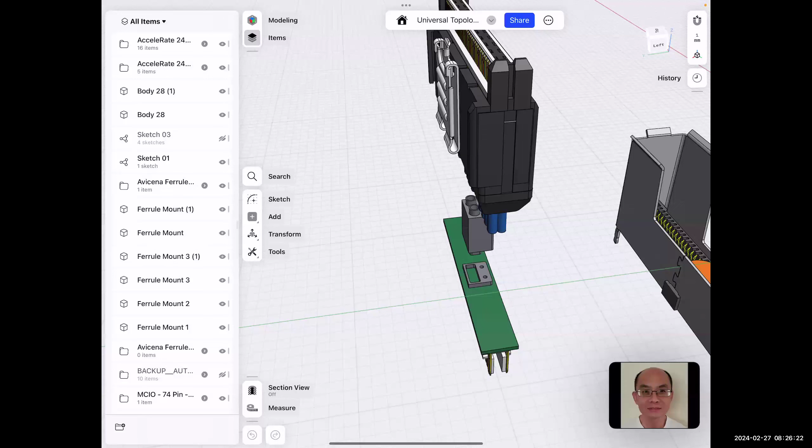So yeah, what I'm going to say is, for the optical, you have to have a paddle card, right? So I don't know what's your judgment - when you're talking about that slide and going around the paddle card argument, it seems you prefer no paddle card, but obviously if you do a universal connector interface for optical, seems a paddle card is a must, right?

So there's obviously 4 different cables we could do, if I've got them all right. One is passive, just copper cables, no active parts at all. The second is active electrical, where you need a paddle card. The third is active optical, where you need a paddle card. And the fourth is co-packaged optics, where you'd really only need a body, a mechanical body for optical fiber alignment, when you mount these fibers in. Does that make sense?

Yeah, so from what you're talking about, I just feel you are talking about the argument of paddle card versus no paddle card. You are only talking about the passive solution.

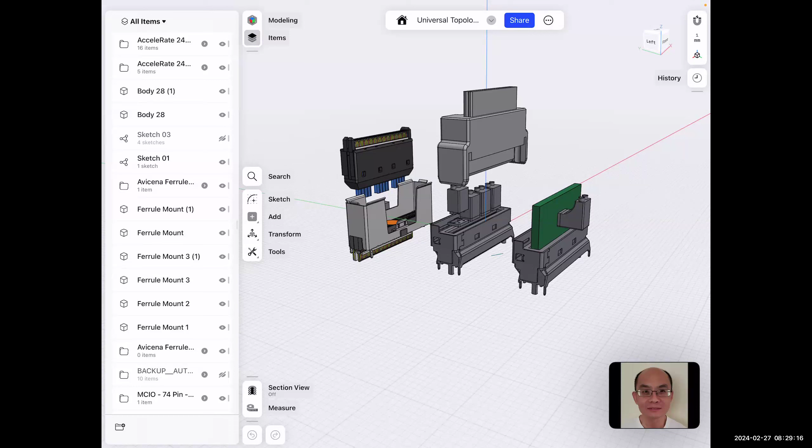Otherwise we could do a paddle card for all, which would be this one - this is the MCIO that we were talking about.

So therefore, the passive approach is you just solder the wires onto the paddle card, and the paddle card then connects to the pins. So yes, we can do this.

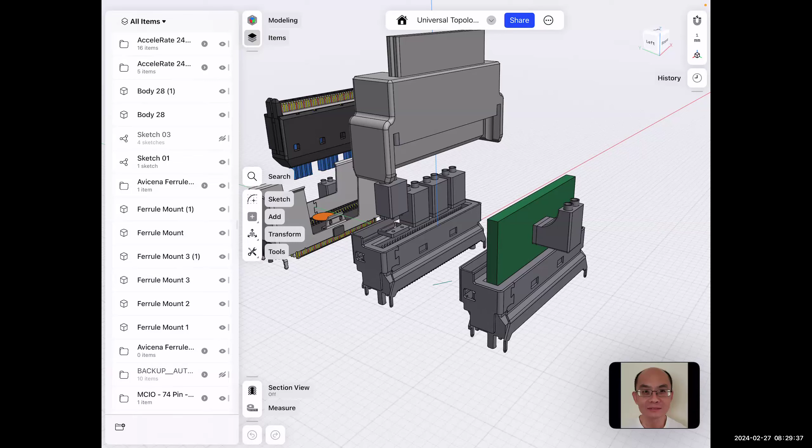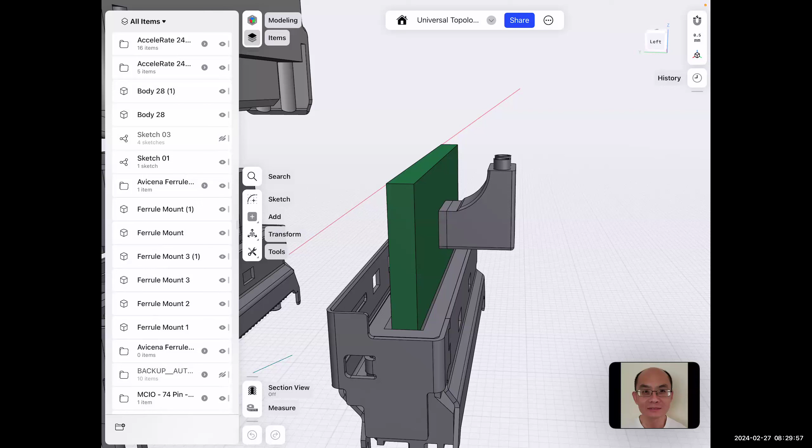I guess with the Avicena implementation, the optics is mounted on the side of the paddle card, and then you have to bend the fiber, and you have a certain bend radius because the optics comes out the top. But I guess the optics can also come out the side if it's silicon photonics - they can come out the top or the side. So fair point - if they came out the side, then this paddle card would work.

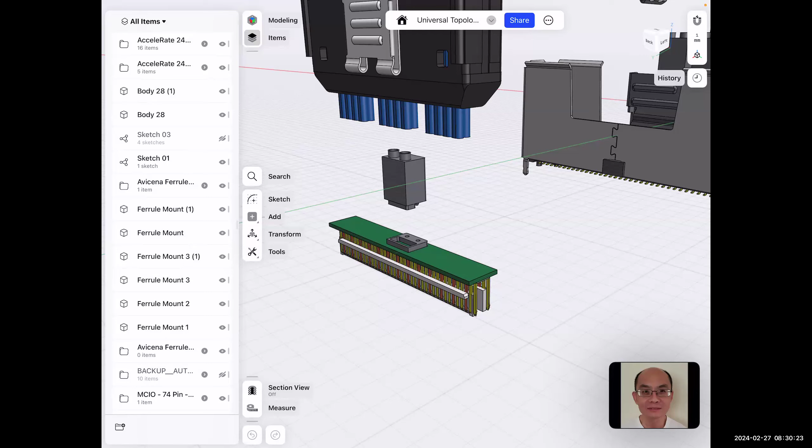What I was showing here is the Samtec Direct cable connect, and I was suggesting we could put a paddle card circuit board onto the pins like this for an active cable, and this would be good for a very clean vertical launch off of this board here.

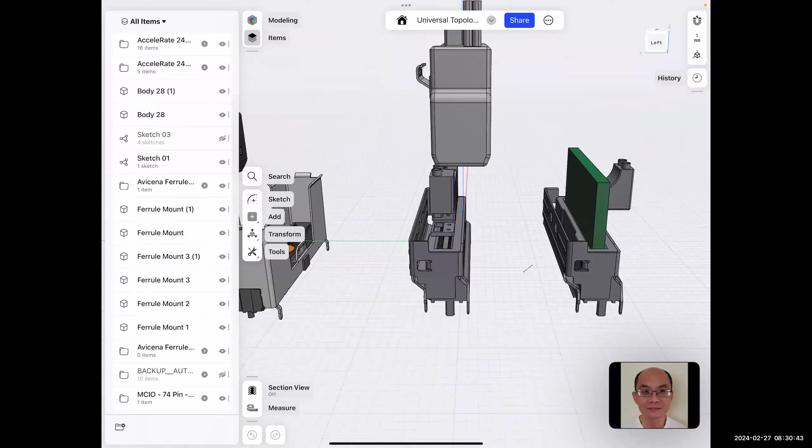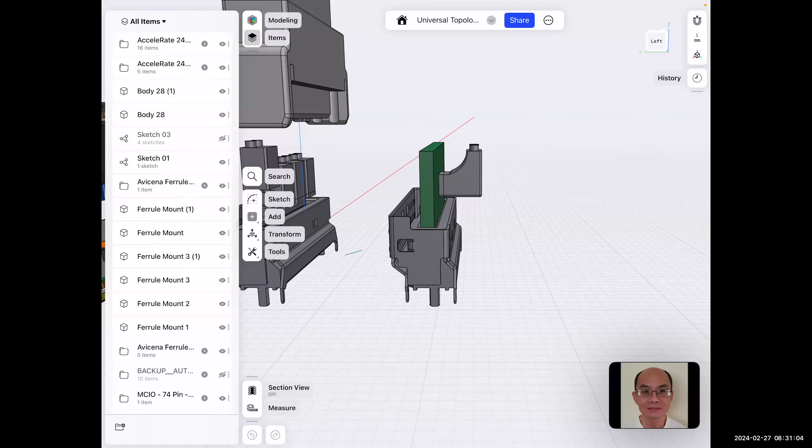I guess the only thing that felt not right was we seem to be going through too many 90-degree bends. You've got the motherboard where the connector is mounted, you've got to go right angle to get to this, then you're on a paddle card vertical, and then you've got to go vertical out and right angle again to get the fiber out. So suddenly this connector has got quite large because of the launch of the fiber cable compared to a paddle card mounted on something like this.

Does that make sense as to what my thought process was? I'm not saying it's correct, I'm just saying does that make sense? Do you see what I'm getting at?

Yeah Alan, yeah, I understand on the optical side. I was trying to think about when you talk about the slides about the paddle card thing. And actually on the MCIO, right?

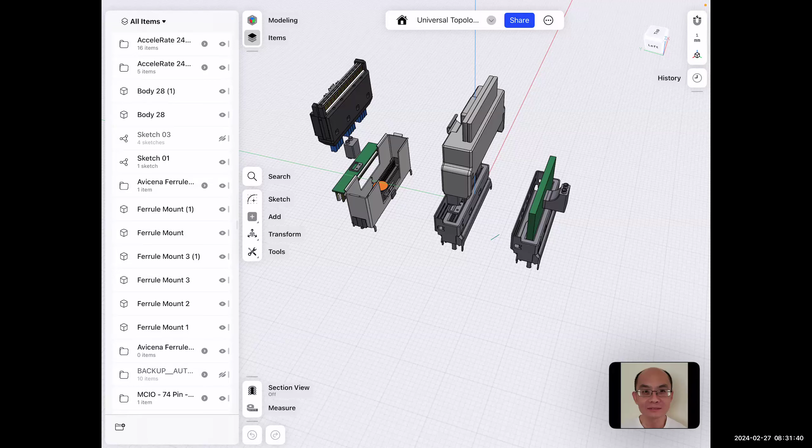We are also, for the passive solution, it's not always like a PCB paddle card is being used - depends on the performance needed. So that is a little bit different, I think, from the standard. So for a passive, it isn't.

So how does it work, because MCIO is a paddle card approach, right? For passive, no? So it's not always the PCB paddle card. So I think you assume the PCB paddle card has more loss, right? And you're saying it's a different material, so you don't have the different materials issue. Okay, all right, fair enough. That's me, not being up to date.

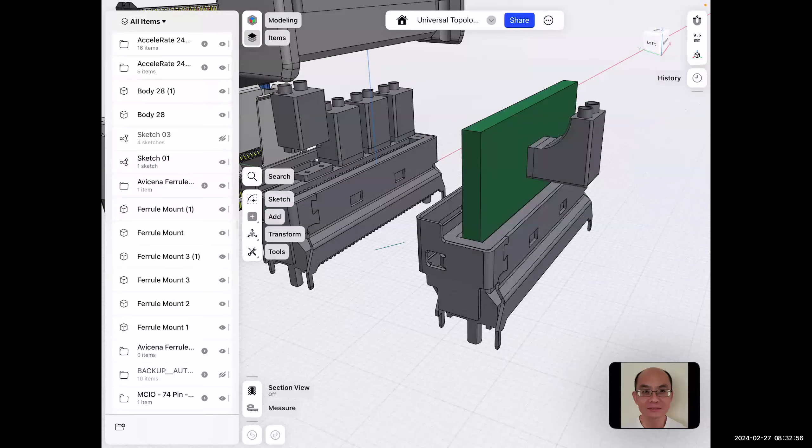So to be honest, we started with MCIO. If we can make MCIO work, then great. Obviously, when we start writing this spec, we have to deal with how these things launch.

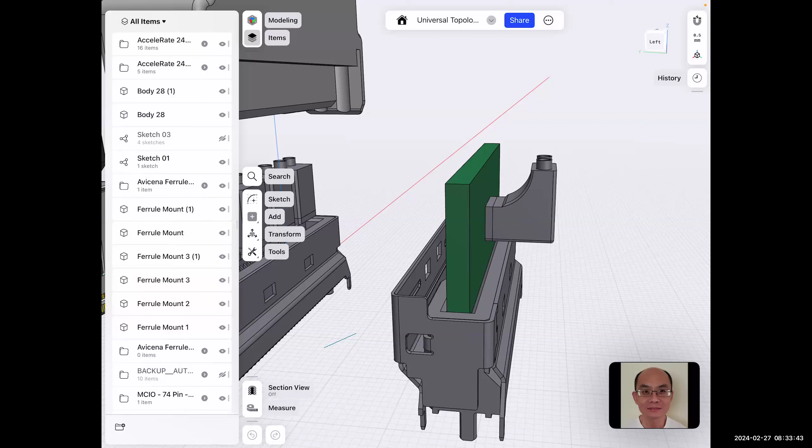Like this launch here, I don't know if this is the minimum bend radius - this is what Avicena have for their model. If you look at other silicon photonics, they can launch from the top. Apparently, theoretically, there's no reason they couldn't launch from the bottom, which is quite interesting, but nobody does. Or they can launch from the side, like if there are V-grooves in the silicon photonics where they mount the fiber. So this particular example would benefit from a side launch where the fibers can come straight out the top, in planar with the paddle card itself. So that would be good.

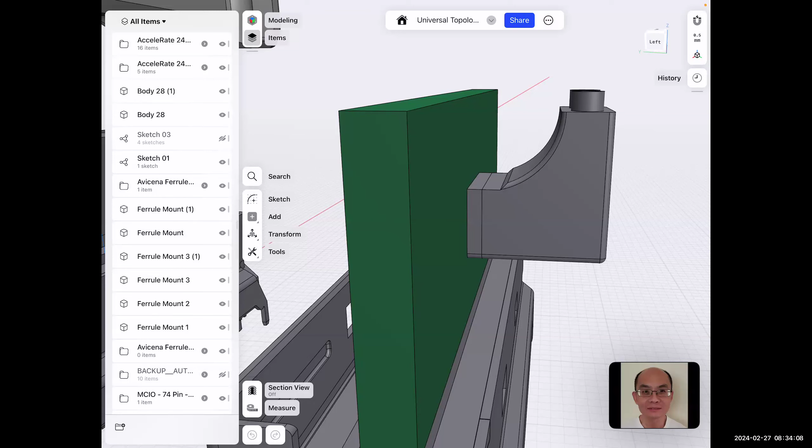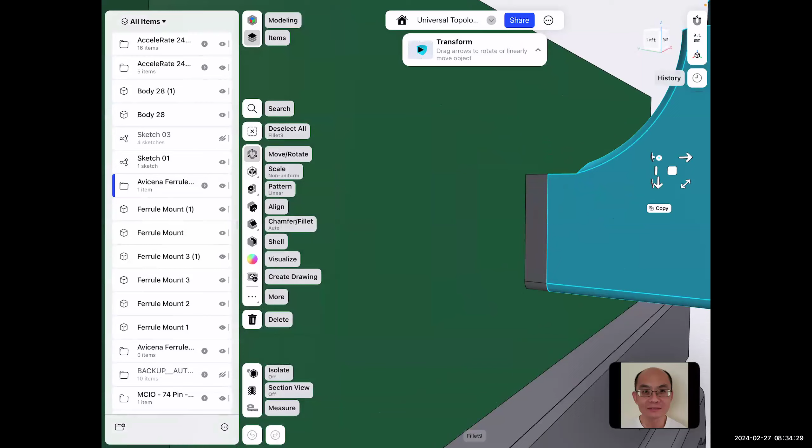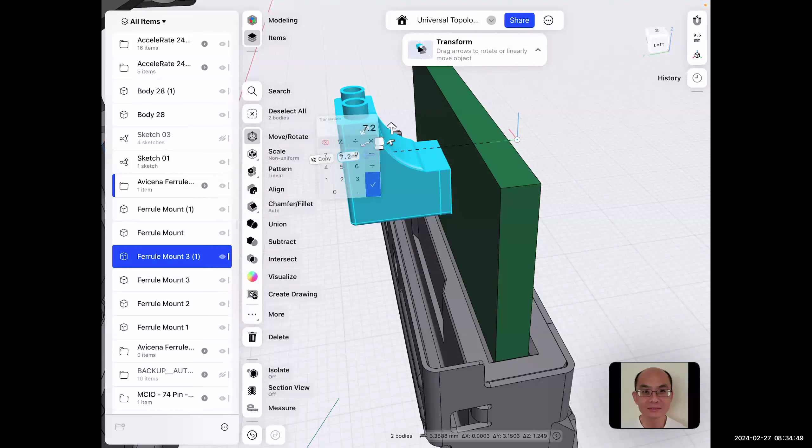So I guess that doesn't rule it out. We would need another discussion with Avicena - I've put it on this side, but maybe what I could do is possibly... you could do it on that side, I guess, but you're still overextending the body of the current connector.

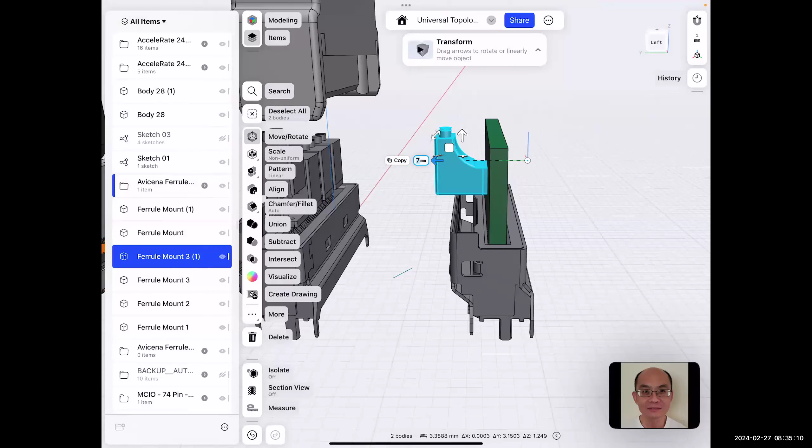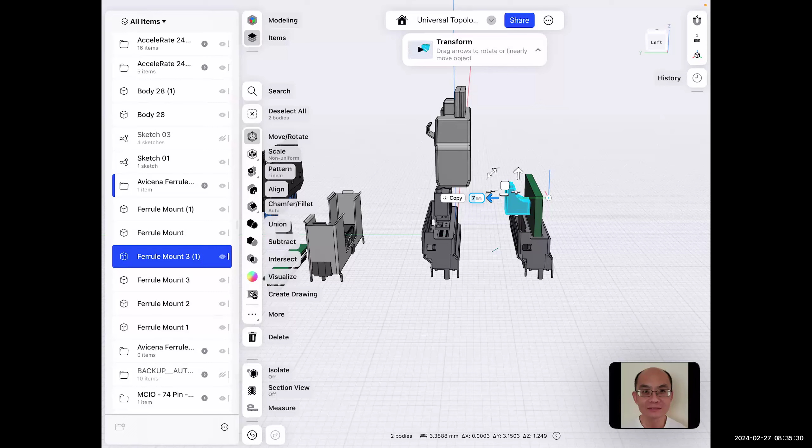Yeah, that's a little bit difficult on their side because the latch is there, right? You've got the latch on that side as well. Plus we need the thermal connection as well - we need to be on the side for thermal because of the active components. That's something we're not considering here - we need to thermally cool these actives.

Oh Alan, seems we... yeah, sorry, my iPad just ran out of power. I was sharing. So anyway...

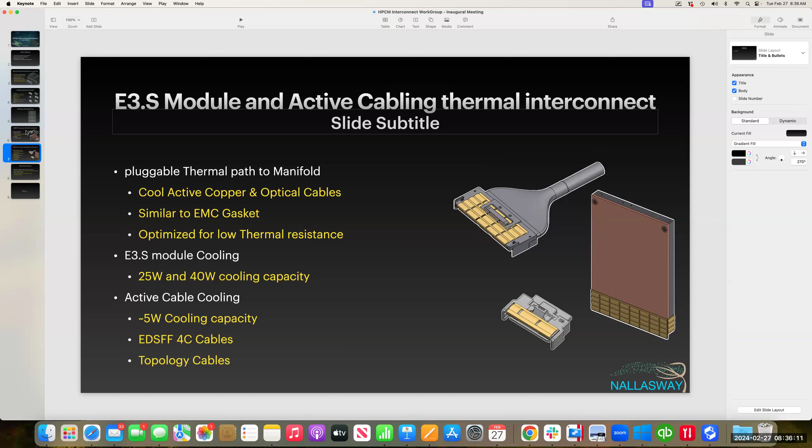We've got the thermal aspect to consider as well, obviously. I think the question will be how big the distance, the gap, between that cable connector to the next module, so whether we have enough space to squeeze in that optical one.

That's a good point. So actually in this particular design, there is quite a big chunk of space here. I mean, technically, but again, we need to think about getting a good thermal path as well as an optical launch.

This is why I favored an optical launch out of the bottom of a device rather than at the top, but no photonic company does it that way today. Although, like I said, I was told by one of the professors that there's no reason the optics can't come out the bottom, or the other side of the silicon to the electrical.

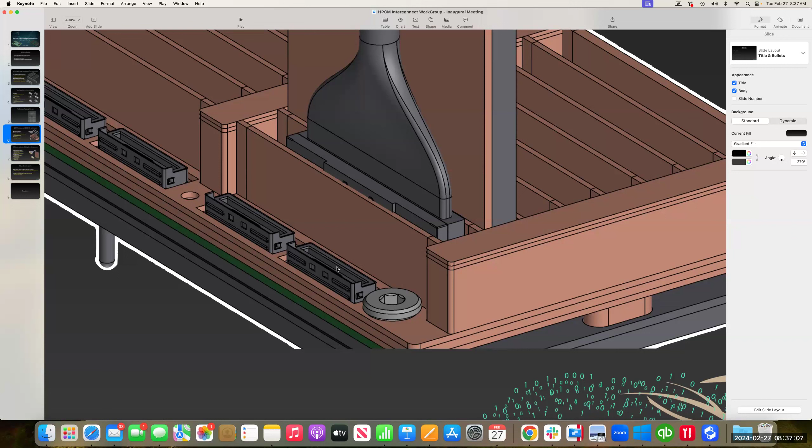This is where I was talking about, if you can launch the optics this way. If I go back to this diagram, the idea here is your co-packaged optics could be mounted on the top with the electrical signals going between chiplets on this top layer, and a hole could be drilled in the board so the light would be transmitted down through to the connector.

So there would still be a clean printed circuit board to mount the connector, but the light would come through from the top through the hole in the board.

And then the photonic chips would have a clear surface for conductive cooling, or either liquid cooling over the top of them, or some sort of gap pad or conductive cooling to the heatsink above, if this was a heatsink design. So optics out the bottom - the novelty of this design is you've got the wet side on the top and a dry side, an interconnect side on the bottom.

You've got the 3D area for a lot of interconnect, right? And you can imagine if you had co-packaged optics all around this device, you could have - I guess as we progress, it's like version 1. As we go to a full-on silicon photonic co-packaged optics world, then maybe we change the format of these.

So my idea is suppose we need to define what's the main protocol for communication between module to module, and inside each big module there are several small modules plugged in, and they may have the same protocol. But if you have different protocols plugged in, suppose for example like the NIC card, and you have all different riser cards with different protocols, you're supposed to convert to the same protocol.

No, that goes completely against what I'm trying to do here. We're just trying to define that we have one connector and cable that can connect all protocols. Yeah, that's no problem, the connector's no problem. But behind that connector, the plug area, you need to do the conversion to make sure on the module board they have the same protocol, otherwise you bring different protocols in.

No. So like I said, the common piece on this is the sideband. So we have this tunneling, I've called it LTPI, but whatever it is, it's its own serial link, and this is the only one that has the defined protocol. A bit like we've been using I2C for 40 or 50 years. It's saying this is a gigabit or whatever the speed of this is, our communication.